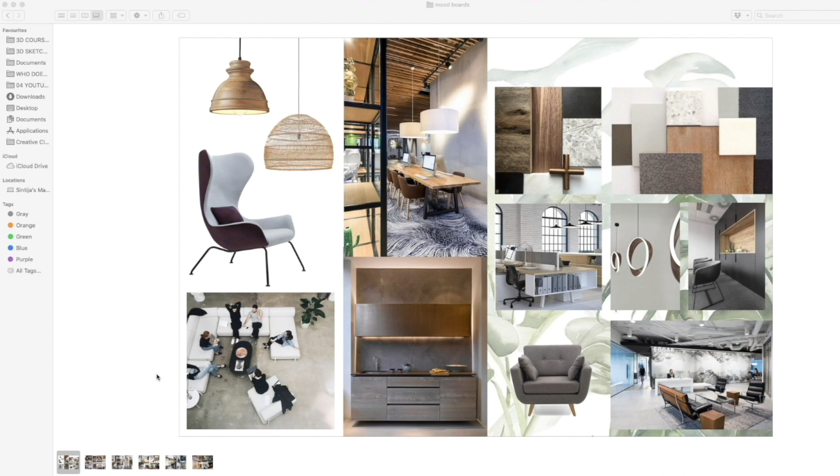Okay, onto the tutorial. Like I said, the best way to go about textures is by referencing your mood boards. In this case, my mood boards were quite general - I haven't selected certain finishes or certain schemes, but what I have done is select images that have the materials that I would like to have. So I have a wide range of options here that I can pick from, as well as different kinds of combinations that I know will work within different situations.

So here, I know that there's going to be some kind of a fishbone effect tile and brass finishes and a nice black and white contrast. So I do have a reference point, but I don't have anything specific as such.

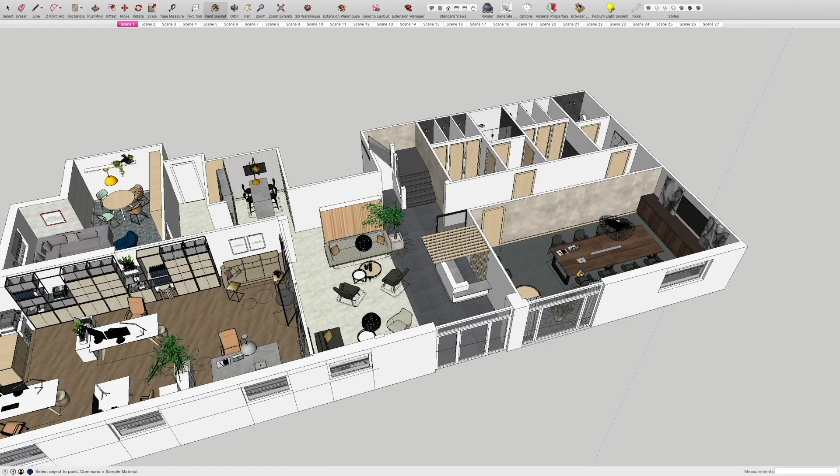Now, this is the actual finished project - I'm not sure if I've said this already, but this is a project that I did for one of my clients. I've worked on it previously and I'm using it as a reference for now. For what we are doing today with the textures, it will be easier for me to reference this model as well, because I know all of this will work and I'm not going to end up showing you some random stuff.

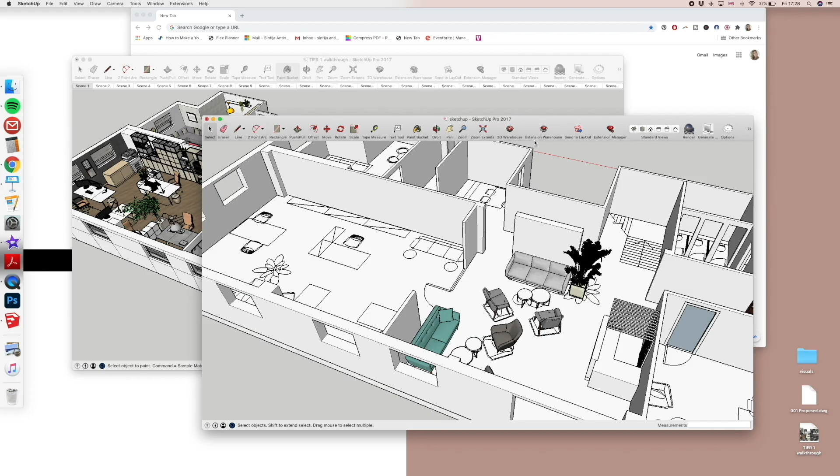Okay, so let's have a look at what we have so far and how we can add some more texture to it. So everything starts with a paint bucket.

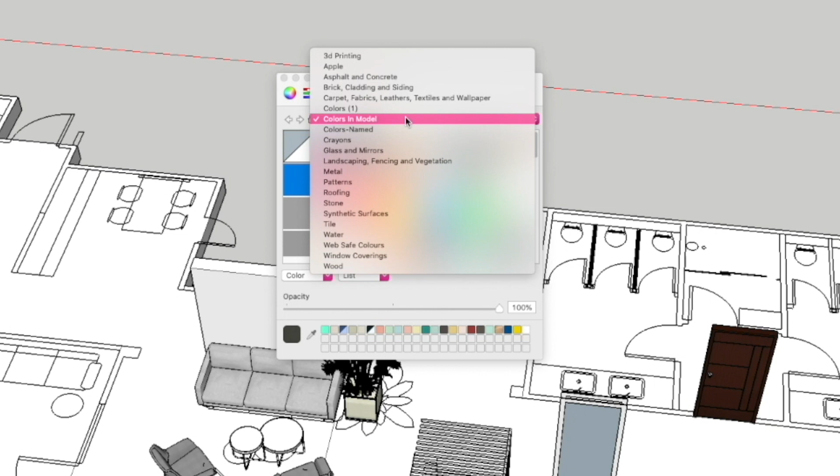Click on it. Now, if you are working on a Microsoft computer, then this window might look a little bit different, especially this section here, but the basics of it all are very simple. Here you can see that there's already a different set of materials and textures that you can use from SketchUp, which is fine.

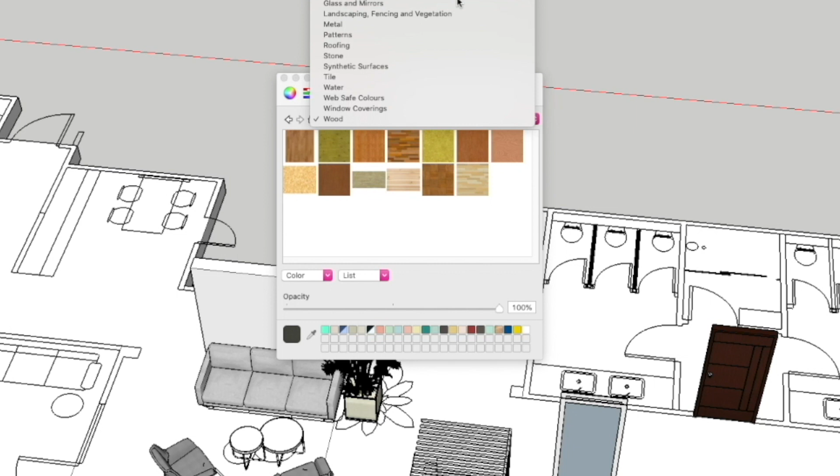They work, I guess, but I don't usually really waste time on these because most of the time, I know what kind of material I want to put there. Maybe I know a specific product I want to use from a specific supplier. So for me, it's always easier to create a new texture.

So what I would suggest is when you are just starting off, pick something specific that's going to jump out, because the interface of this little window here is not really the most user friendly.

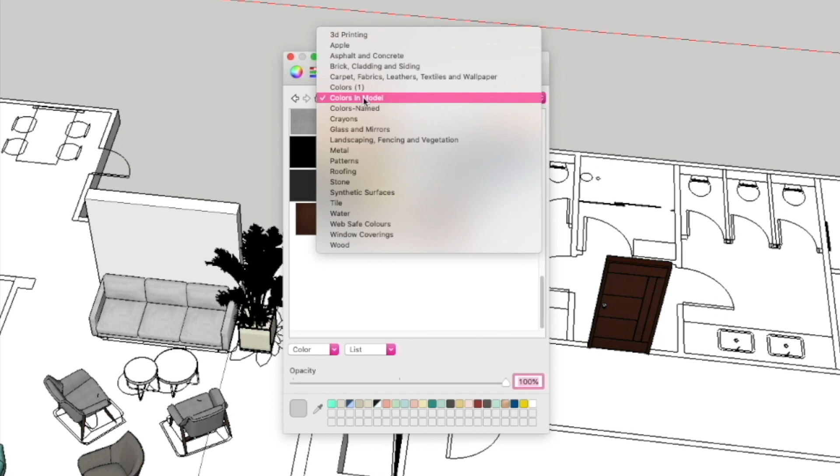So if you just scroll down and select this colors in model, that's basically all of the textures, all of the colors that we have used already in a model, or maybe all of these objects already have built in. I would suggest to use something that really stands out so you can see that you have duplicated that. So I will duplicate this one.

Okay, and there you go. Now you understand what I mean by really seeing the difference.

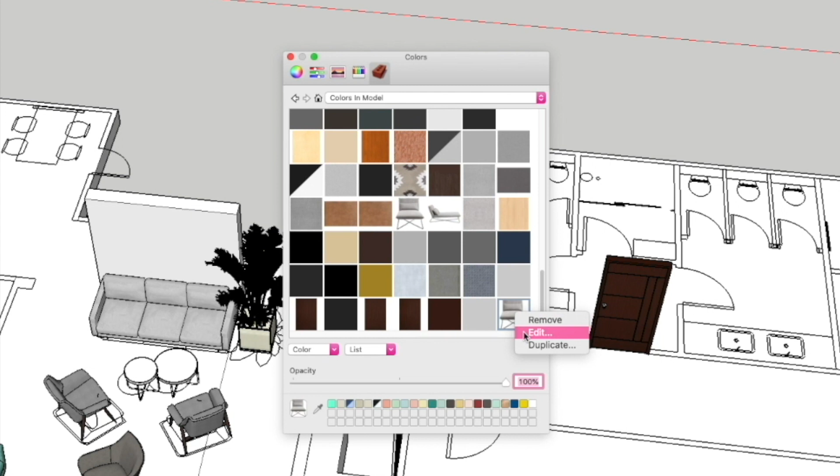So now what you need to do with the copy is just click edit, and the little material window opens up. So what you can do here now is change the width and the height of the texture. You can change the name. You can change whether to remove the actual image or maybe to edit the image.

Sometimes maybe you want to change the color of your texture that you've picked of the JPEG, so then it will open it into a different software. But that's very messy, so I would not suggest that.

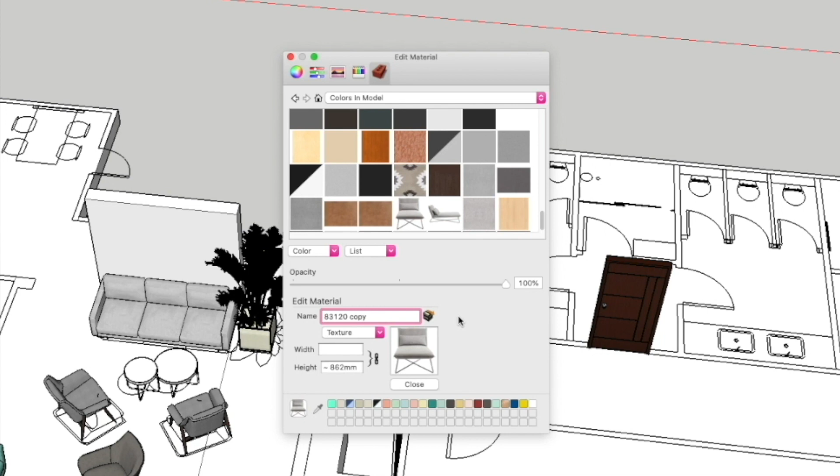Okay, so to change the texture or create the texture that we want, we actually first of all need to find something that we like. So let's look on Google and see what we can find.

From what I can remember, the texture was quite geometric and earthy. So that's exactly what I'm going to type in: geometric fabric and brown, and I'm going into images.

Obviously now you can pick and choose whatever you wish. For the training purposes, I will just go with something that jumps out. I feel like this one could be nice.

So what I'll do now is right click on the image, save the image as, find your folder where you want to save it, and I will need to create a new folder which I will call textures. Strongly recommend creating a textures folder just so you've got one touchdown point for all of the textures.

Now what you can do is either save this texture name if you know the supplier and the name and color and the specifics of it, or what I like to do again, just use my numbers and name it as O1. Now we head back to our model.

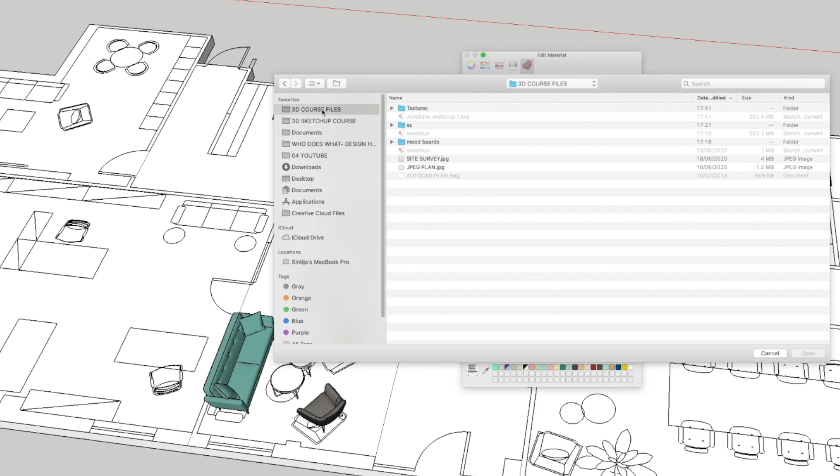Here's our texture. I will click edit. There's our little window. So we need to tap on load, which will open up all the folders that we need. We find our texture folder, select the image that we want, open it up, and there we go. It's loaded in.

So now with your texture, you can change the opacity. Sometimes if you have like a film on a window or glazing that you want to create, then that works well with opacity. Or if it's like a sheer curtain, or even glass material, then opacity works well with that. But this time we're not going to touch that.

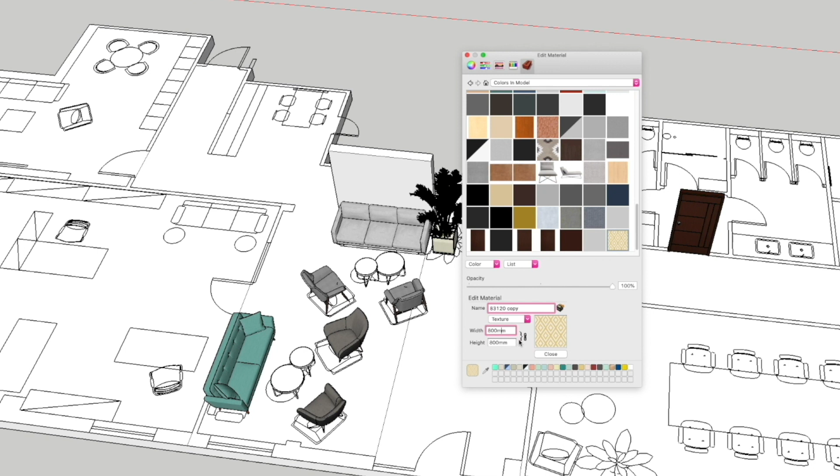What you can do here is also change the proportions of this texture. One thing to know about this little locking feature is that whatever your proportions or dimensions are originally from the file that you dropped in, if this lock is locked, then if you are changing something either on the width or the height, you need to be aware that the other dimension will change as well.

So you can see, but if we are unlocking it and suddenly I want the height to be less than that, then the other dimension does not change. And if you want to keep these proportions, you need to make sure that you lock it back again. So now if I was to change the height to 1000, then this width would change proportionally as well.

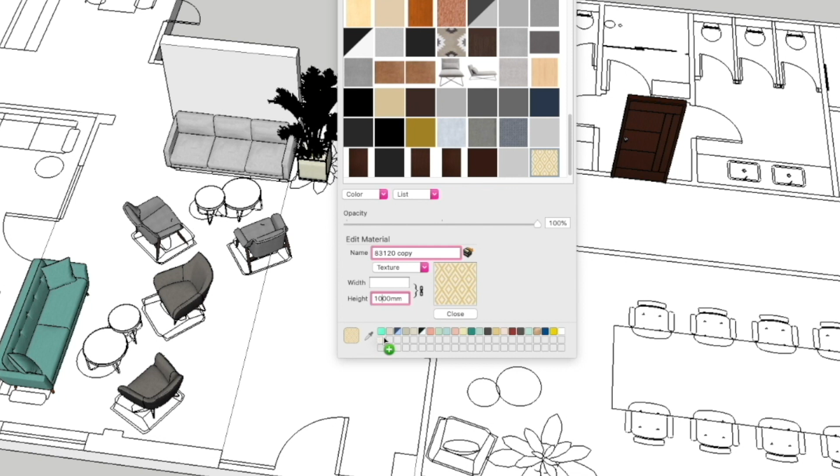I hope that makes sense, but just keep this in mind, and if sometimes the texture doesn't look right, always come back to these dimensions and play around with them to see what works best. And you can always drag it into your little palette under here for quick access as well. That's a good time-saving tip.

That is basically all you need to know about this little texture section. So let's see how we can apply it to our sofa. We need to open up our sofa until we can select the whole surface, until there's no frame around it.

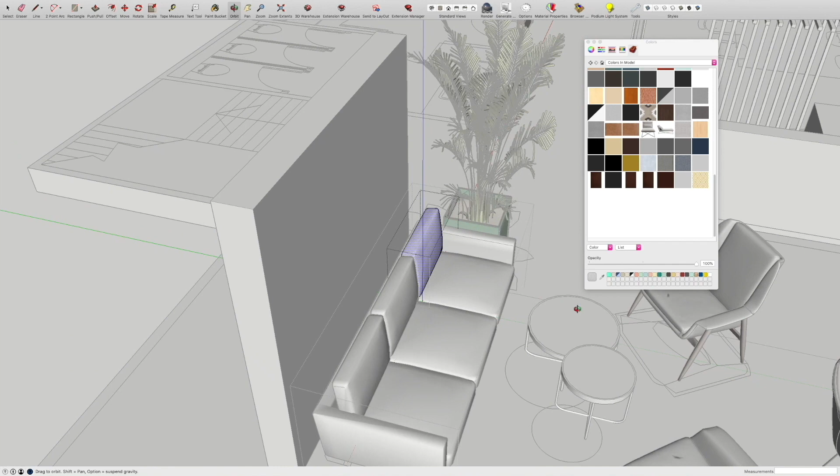If you haven't got your colors window open on the side, just click on the paint bucket and it will automatically open up for you. Select your texture and then just drop it on the object.

Now you can see the actual size of the texture, and if you want it to be smaller, you can go back into your edit settings and start editing the size of it. I'm thinking I want this to be a lot smaller, so I'll go for half the size and see how that looks.

600 looks smaller, that's good. I want it to be a little bit smaller than that, half of the size. There we go, I think that's more like it, and I can just close it.

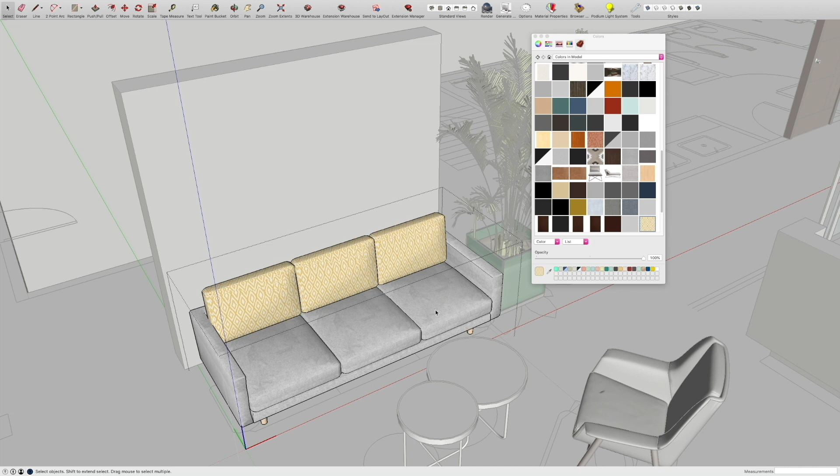Now, sometimes we don't need to enter the group itself, and if we just click on it we're able to change it, but that's not this occasion. So we need to just drop it on each object. It's a little bit time consuming, as you can see.

This is where the component comes in handy. If all of these objects were components, then it would be a lot easier to just change one and the rest of them would change.

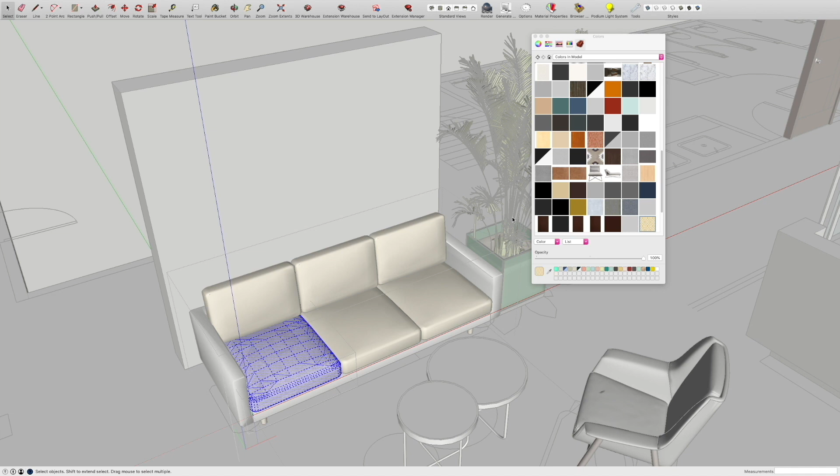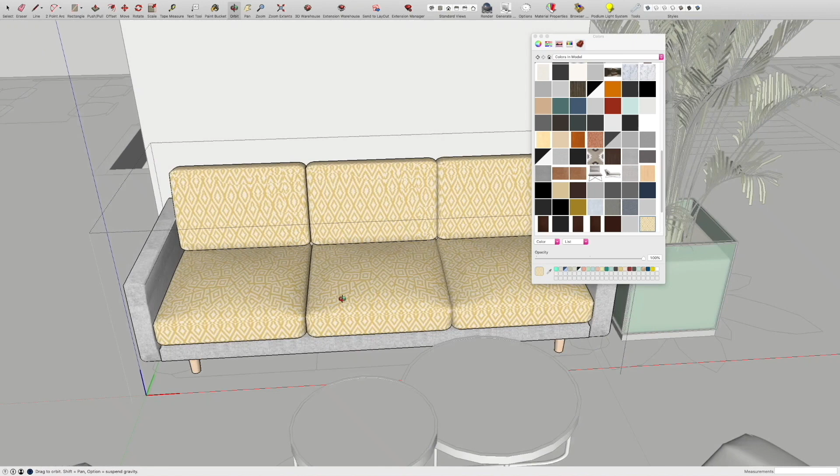Now, a funny thing I've just noticed is because this has been modeled in different software, it will obviously look a little bit different. So when we add the texture, it kind of looks a bit funny and funky. But unfortunately, that's the price we sometimes have to pay, and we just hope that in the visuals it's not going to look as crazy as we might think. And even if it does, we just have to roll with it.

Okay, just make sure you rotate around and haven't missed out any other detail on that object. So we've got a very interesting sofa finish there.

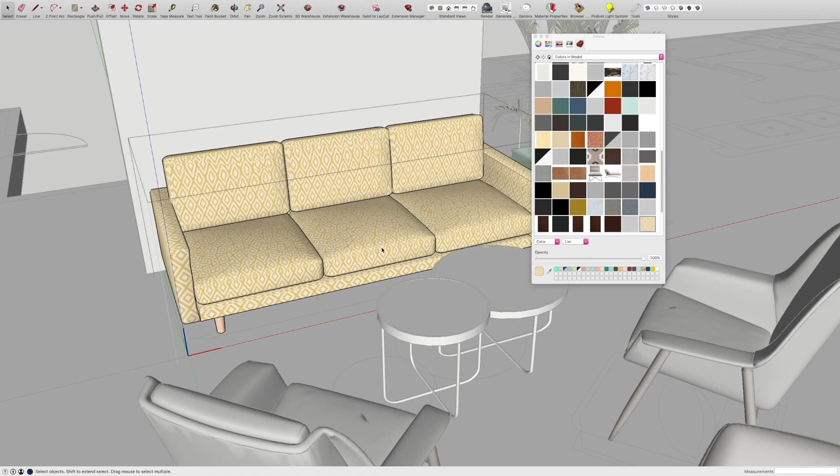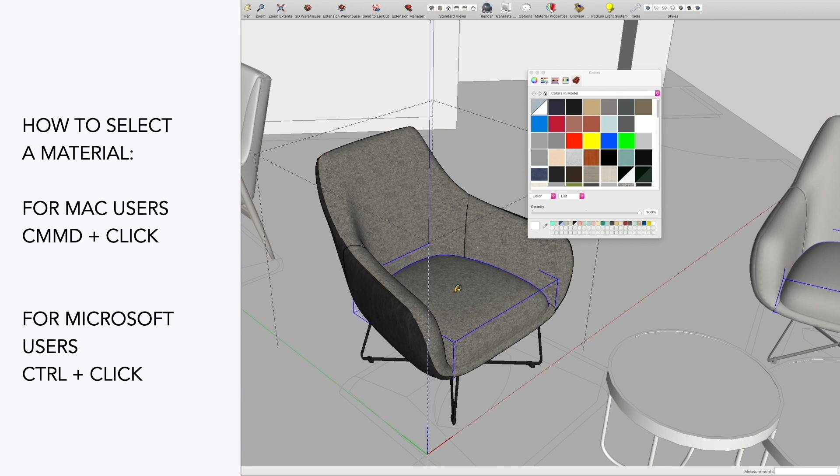Another way to change materials is actually by changing the existing material that's already on the object. Let's switch around a little bit and take this chair for example. All you need to do is select the fabric that you want to change. You can see that's the fabric right there.

This time, instead of duplicating it, we will edit the texture. The way you add a new texture, your desired one, is you just press load and it opens up your folders. Find a texture that you like.

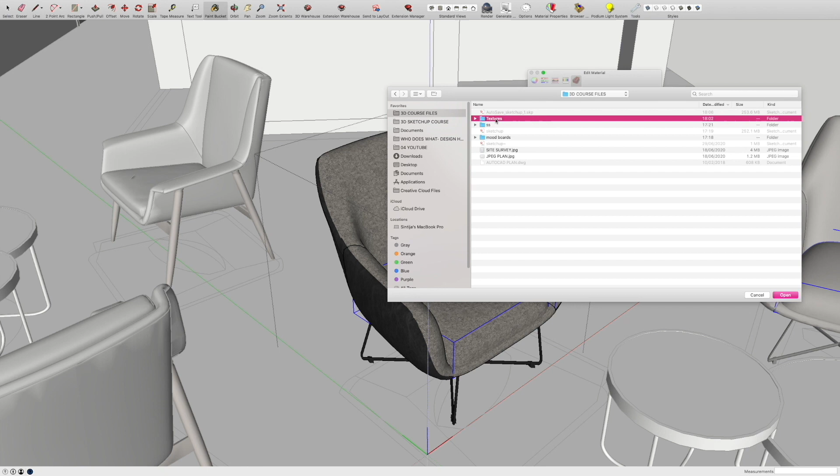And load it in. Now you can see, because these two chairs were components like I mentioned before, the fabrics and all of their elements are changing. As I'm changing one, the other changes as well. So this is handy when you have multiple items around the project that you want to change straight away.

But sometimes if you don't want that change, then what you need to do is break it up and make it unique. So I'll show you how to do that now.

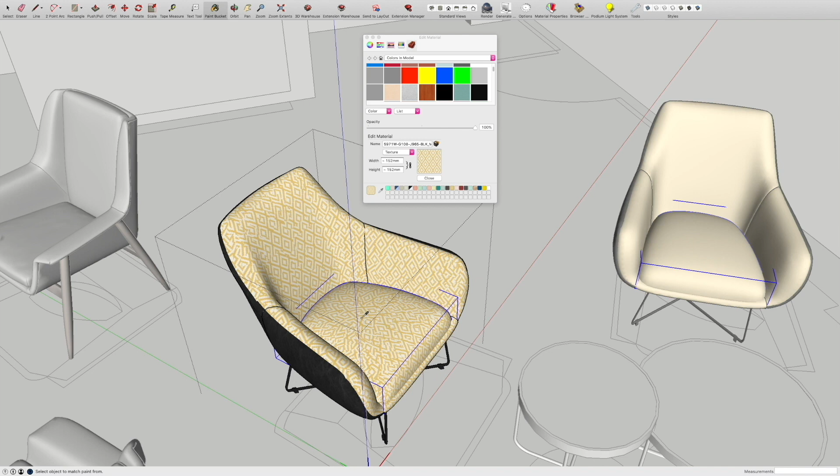Let's say, for example, I'm happy for the backs to be that kind of material, but I want the seat pad to be different. So what you need to do in that case is completely exit the object and start right from the beginning by making it unique. It automatically does that, but it doesn't end there.

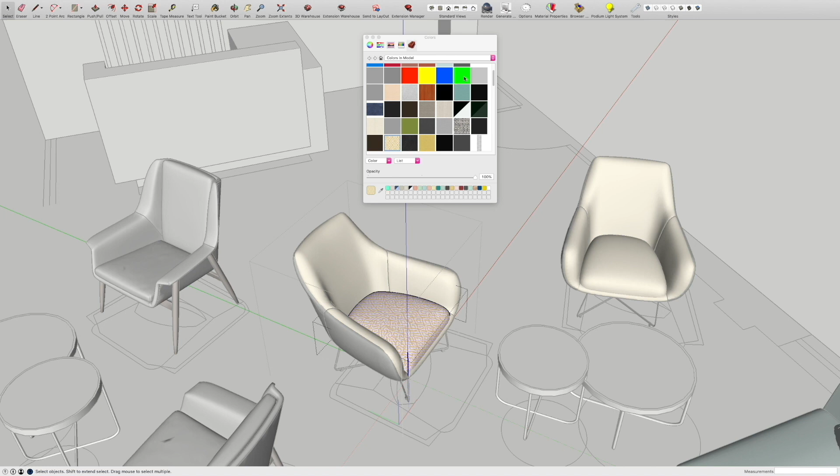We need to open up the object and now make unique the seat pad. Okay, so now let's say I'm just going to grab this great green color and pop it on there. You can see that this chair has changed color, but this chair hasn't.

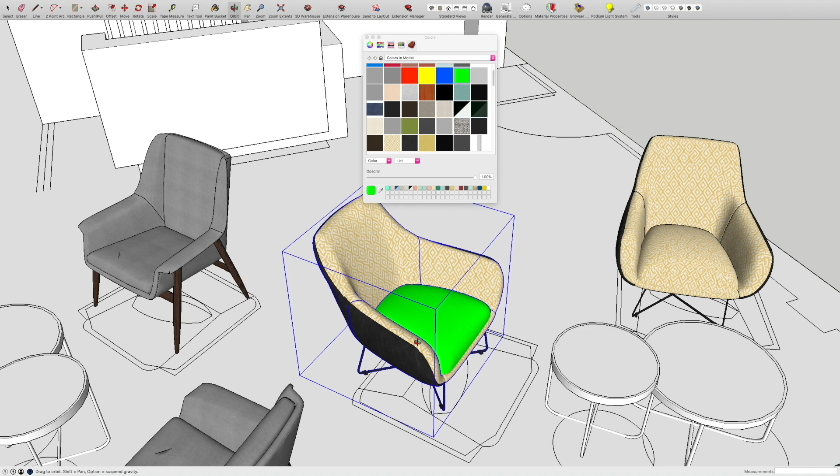So there's a little technique you need to keep in mind if you want some things to stay similar, some things to be different, and just how to manage components. Components can be quite time consuming, so just be patient with it. But sometimes it's very handy to have components already all around the project.

I have had projects with like 400 tables and seats, and it's easier to just change one chair instead of changing every single chair. And then there's another way to create a new texture.

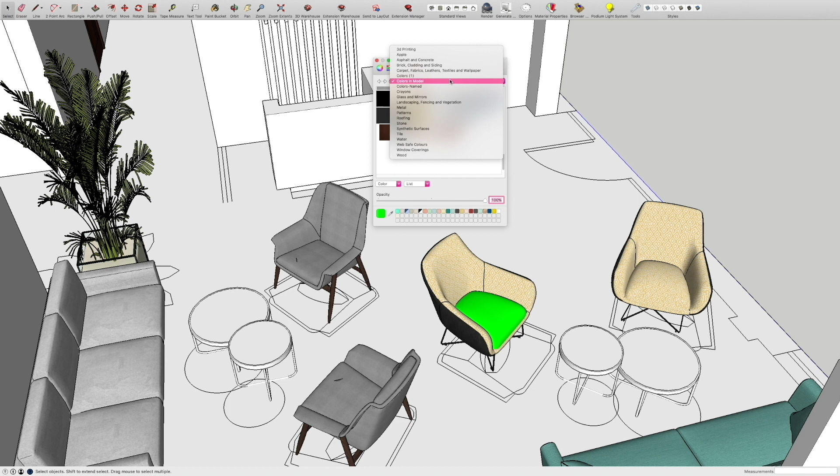Basically, you need to make sure that in this little material window you have selected colors in model, not any of the other colors in model, and then just find a white space somewhere and press right click and new texture, and the rest just follows. You pick your texture and create it from scratch.

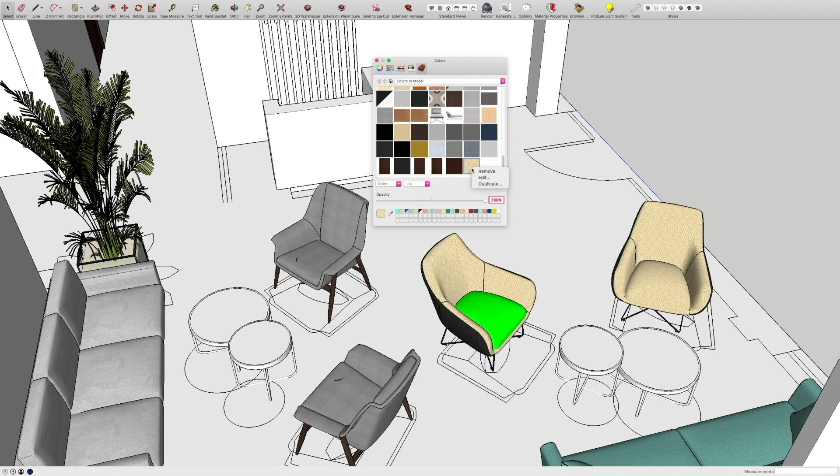And there you have it, there's your new texture, and you can edit it the way we have done so far. Okay, for this next section, I wanted to show you how to actually change the size of a texture on a flat surface.

So let's say, for example, we'll take this flooring material here. You need to just open up the group, zoom in a little bit, and just select the surface.

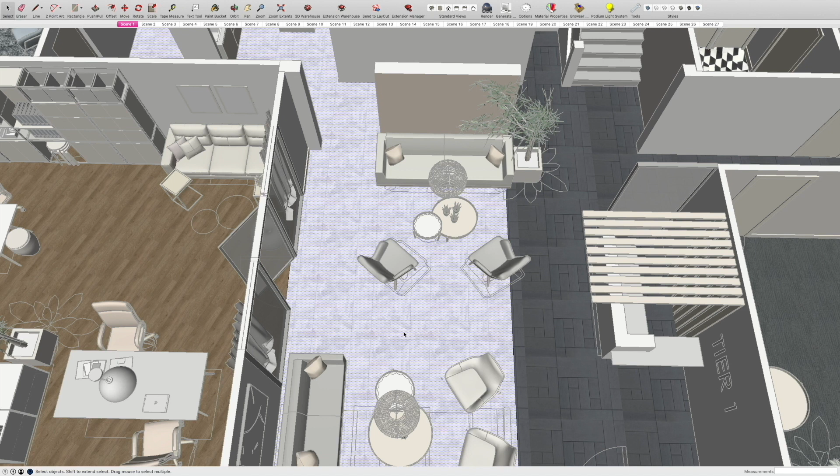Don't double click. Sometimes when we double click, we select the surrounding lines as well. We only need to select the surface, then right click and press texture and position.

This little window will pop up with these colorful points. The only one we need to really use is the green one. I never tend to use the rest of them, they kind of skew and transform the texture, which I'm not really bothered about.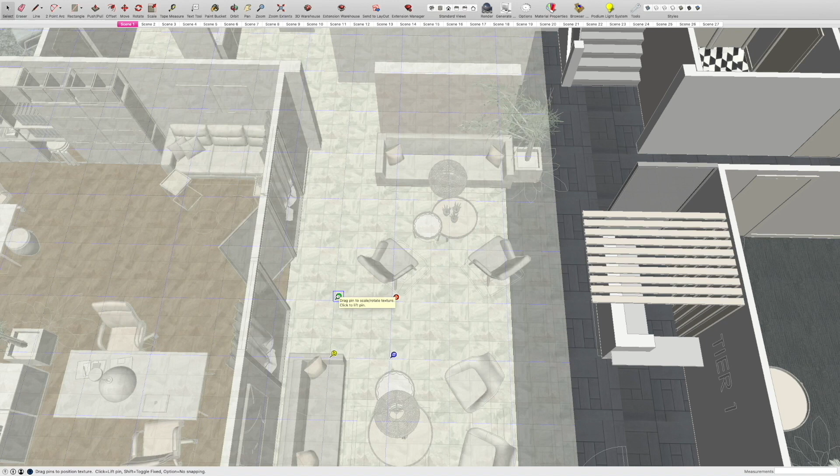The only one I need is this green one, which scales and rotates the texture. So if I click on it and hold it and start to drag it around, you can see how the angle of the texture changes, the scale of the texture changes. It's easier for you to manipulate the texture over here.

So if we wanted to go bigger, we can do that. Also with this little hand tool, once you let go, this little hand tool activates and you can move the texture around. So if you don't want your tile to end halfway through, but want a nice connected line, you can pull it all the way down there, and you'll see there's a little overlap, so just extend it up a bit and now it fits nicely. Then just escape and exit the group.

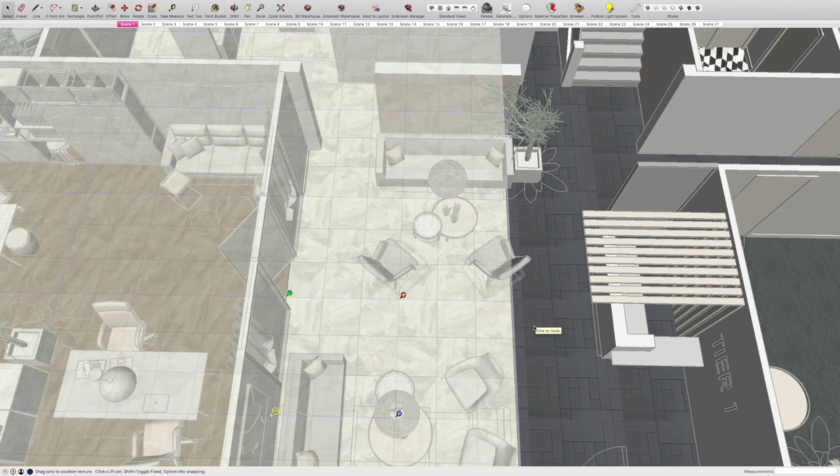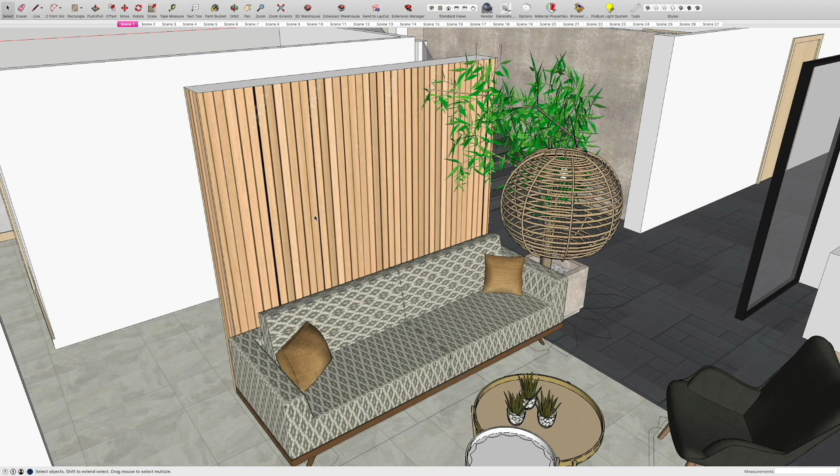Another thing to know about textures is that sometimes it's easier to use a texture instead of an object. This wall is technically a slat wall, so I could have drawn it slat by slat like I did here, but actually I picked a texture that mimics that effect I'm looking for. It's better for you, it's a lot quicker, and it's better for the model because it doesn't bulk it up. It's just a flat texture, not loads and loads of little slats that will take up space.

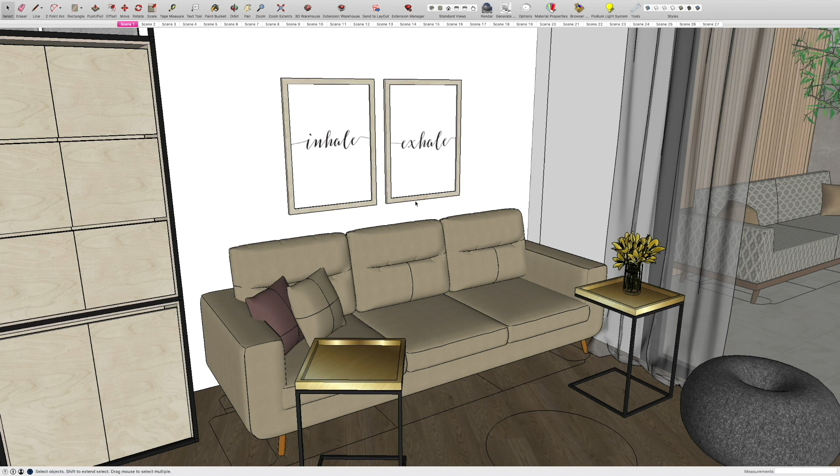Another thing I wanted to show you was how to just drag and drop a texture. Let's say, for example, this artwork - I already have something in there, but for training purposes I'll change it to something else. So what I need to do is the same as with other textures, I need to go online and find an artwork that works for me.

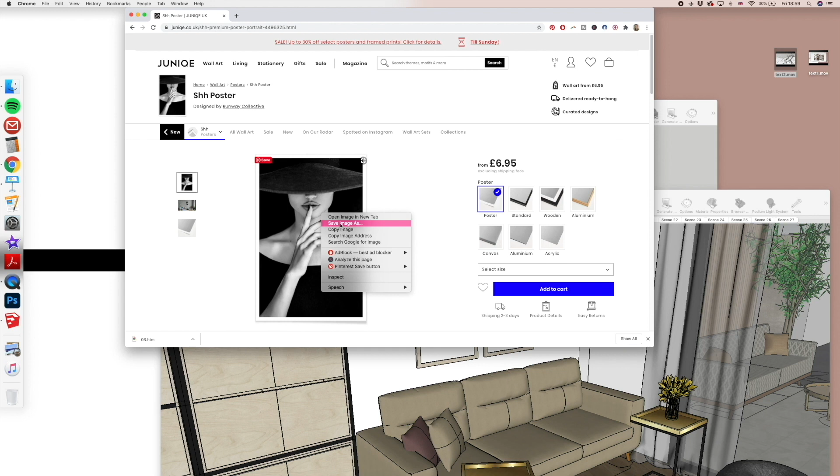So I have found this artwork, this lovely lady that I want to put in. So I would just go and save the image. Now, unfortunately, what's happened here is that it's asking me to save it in a weird format. We need it to be a JPEG or a PNG.

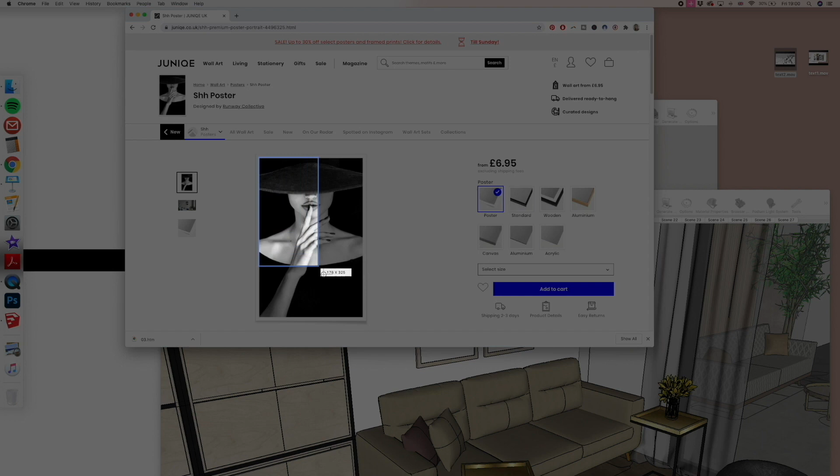So I'm just going to click cancel, and instead I will go to my little snip tool and capture my screen just where the artwork is. Save it on the system and make sure I can find it in my folders. So here I have my image.

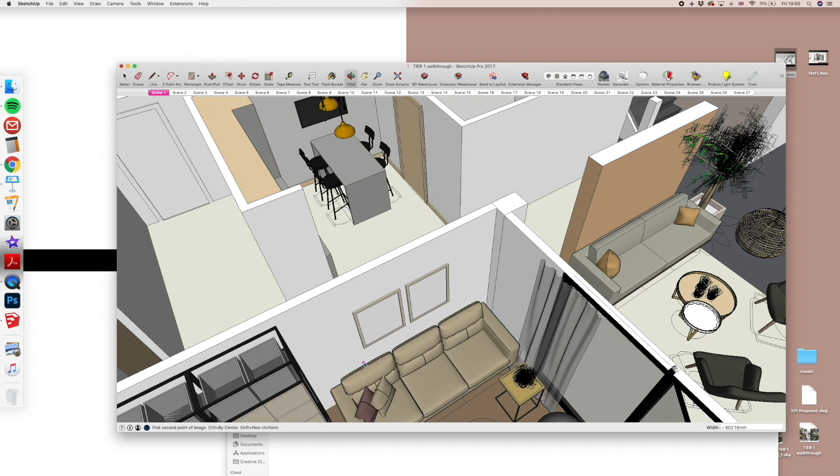What I'm going to do now is literally drag and drop into my file. Let go, click in the file, rotate around a little bit, and click on any edge. Right, so you can see it is huge.

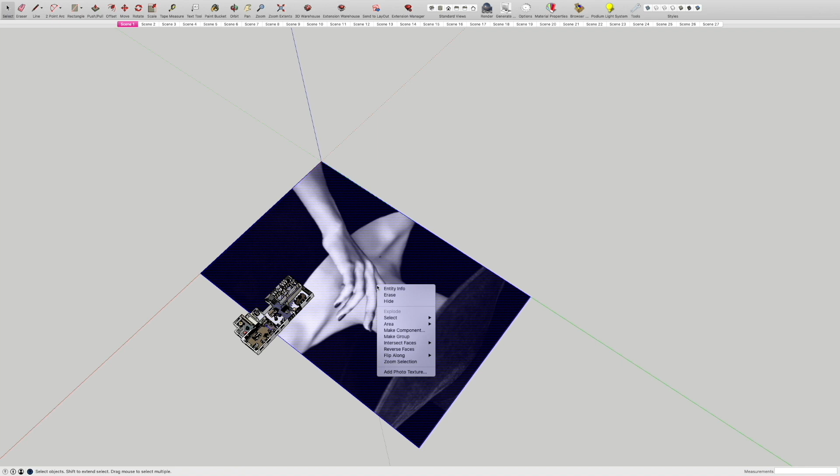But before we do anything to any texture at any point, once it's dragged and dropped and placed wherever it is, what we want to do is make sure it's selected and right click on it and explode it. Once it's exploded, right click on it again and make a group. By doing this, we are almost transforming this image to a texture that we can modify and play around with.

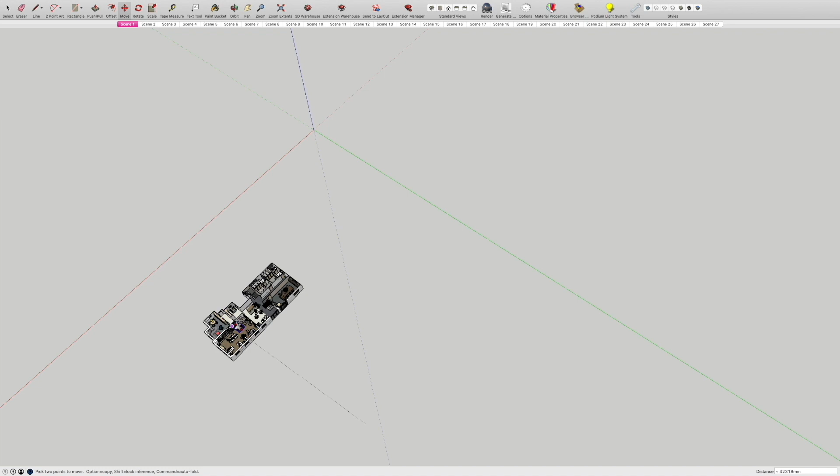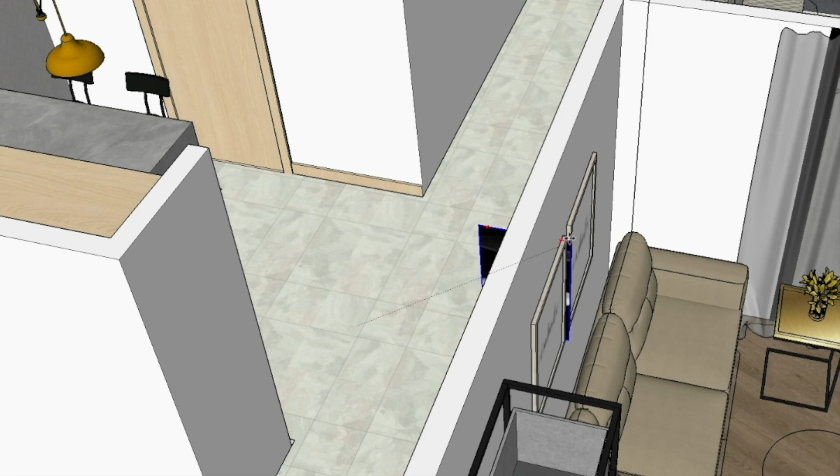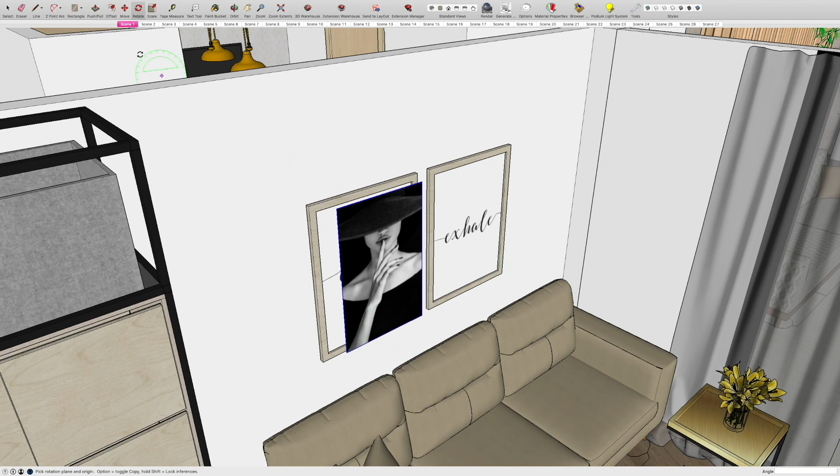So now we need to make sure we scale it down to a size that we like. I'm using my back wall as a reference point to rotate it around, and then using this wall to bring it back up. I'm just going to place it on this little edge. Now, when we have it on the same plane as desired, we can just place it in place right there and scale it up a little bit.

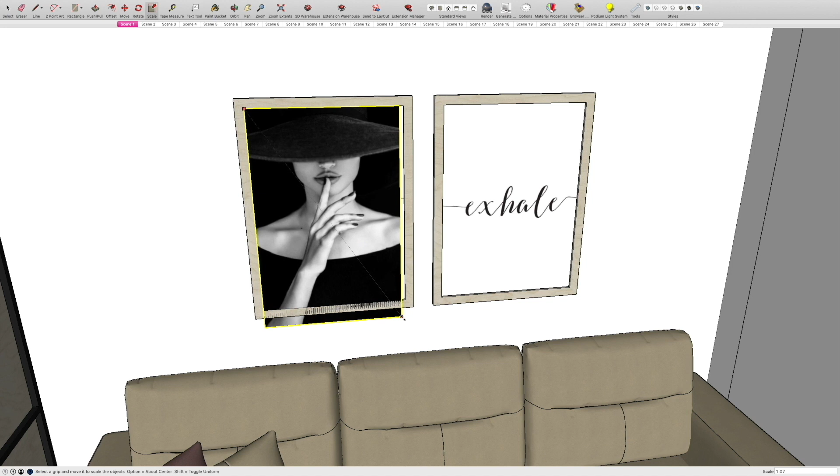So obviously if I start to distort the woman, she's going to look a little funky, like we did previously with the door handle. So I'm not going to do that, but what I'll do is drag it so it overlaps the frame. And because it's like any normal surface now, I can open the object and just cut it down, whether it's down here or maybe up there, whichever.

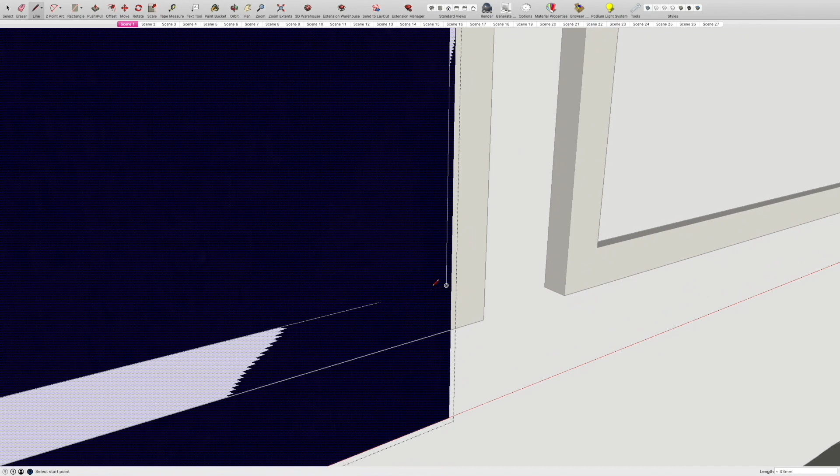Now we're just going to cut it down here. Zoom in. I don't think it went to the edge - yep, it didn't, so make sure it goes to the edge. Delete all the unnecessary lines. And now we just need to move it back a little bit.

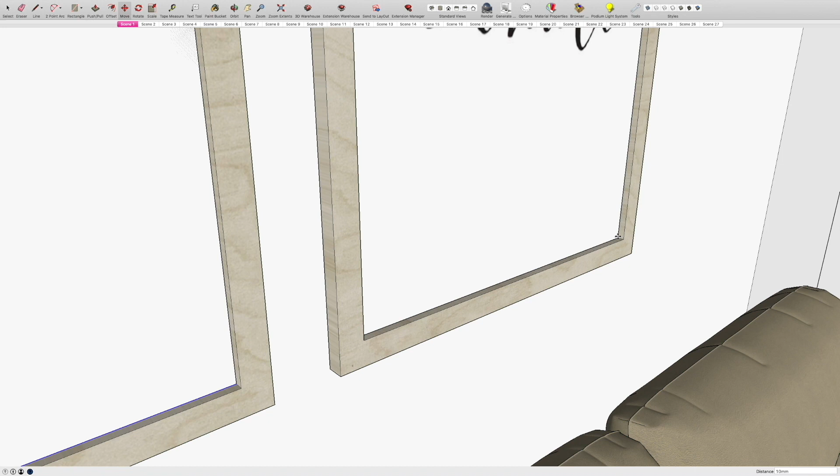Sort of, I'm using the other frame as a reference. So obviously what you can see now is that both of these textures kind of overlap, so I'm just going to make sure I delete the old one. And there we go, we've got new artwork there, and that's how you drag and drop any texture.

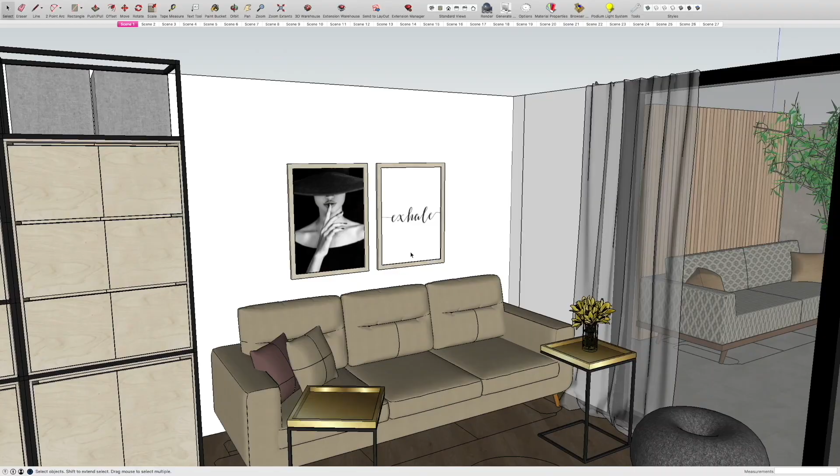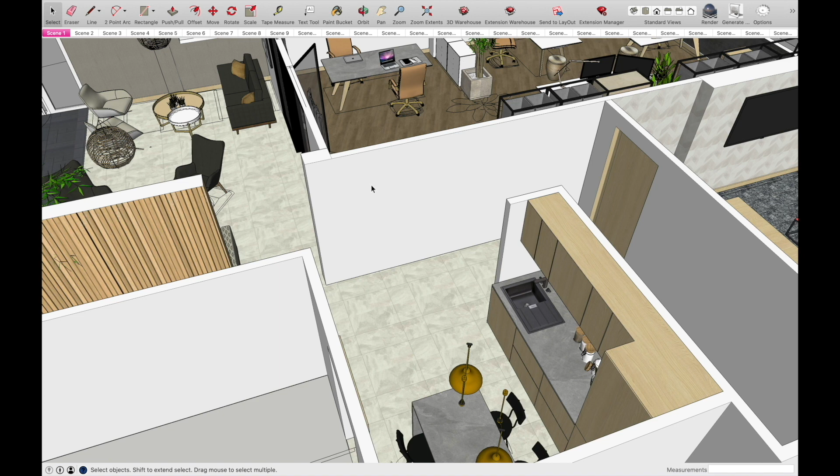Okay guys, one last thing, well, a couple of last things I wanted to show you was how to drop in any 3D text or 2D text. So for example, if you have some sort of writing here that's just like lines, or maybe there's some artwork that's got a transparent background, basically a PNG image, if you have that and you want it to be like a large print, how to do that, and also how to create 3D signage, which isn't there at the moment because I haven't created it. So I will show you how to do that.

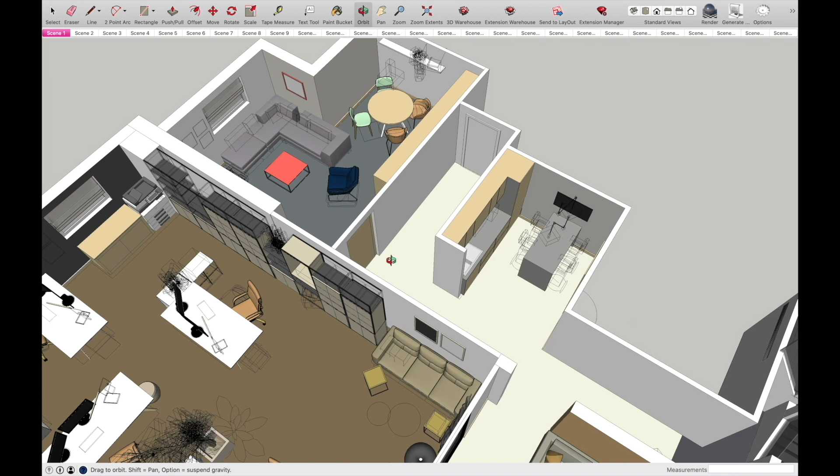So I'm going to switch it up and choose this kitchen wall around here. For example, if people are sat at the table, they get a nice little welcoming message there. I've already found a PNG image online. The way you search for PNGs is literally just by typing what you want to find, so I was typing for positive quotes and typed PNG after it, and you will find that. Or if you know how to deal with Photoshop, you can always just drop a JPEG into Photoshop and create a PNG from that.

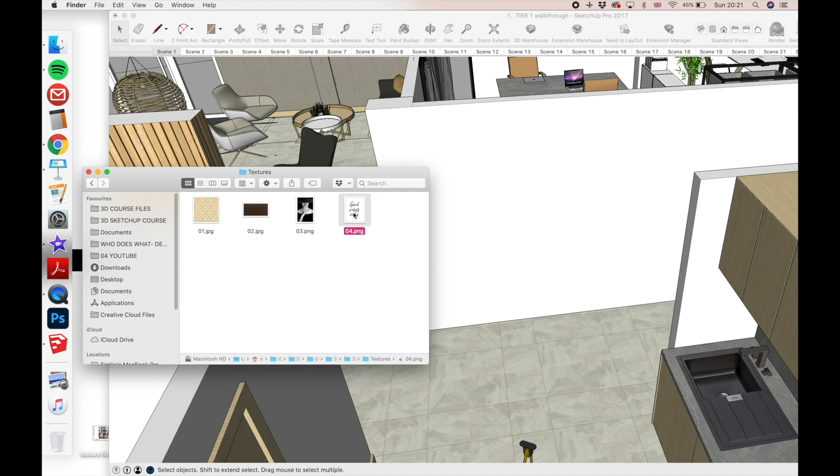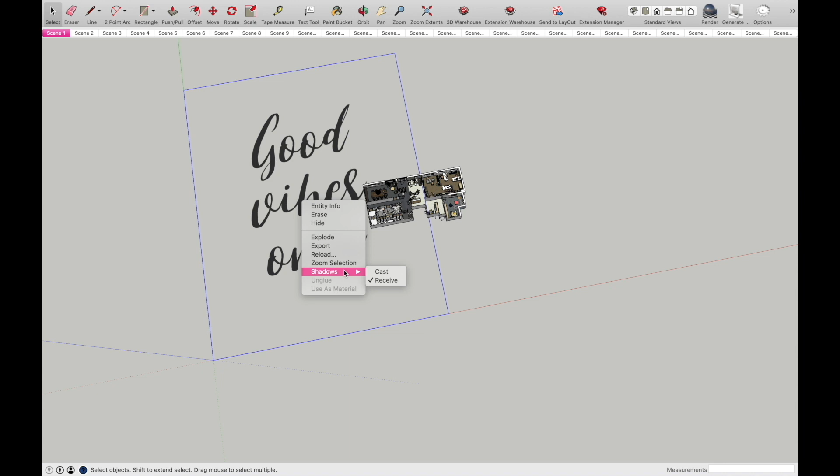So what we're going to do is the same old drag and drop method. There we go, just click on it, click on any point or edge and zoom out, find your texture, and obviously it's off scale. So again, what we do first with all the drag and drops is explode and create a group, then we can scale it down to size.

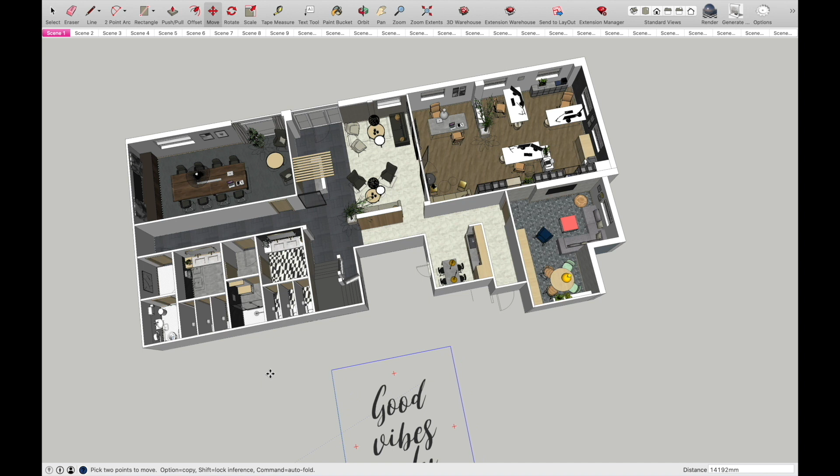When you are zooming in and out in SketchUp, always use your model as a reference. Don't use any kind of empty space to scale in and out, because otherwise you'll be going for ages. When you have something solid to scale against, SketchUp recognizes that a lot better.

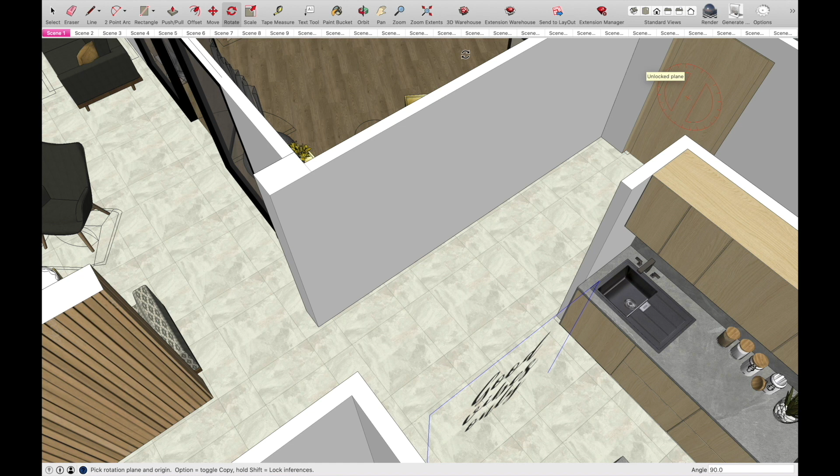Again, I'm going to use the side wall as a reference to place it at a right angle, and I'm going to pop it around here. So that's right there. Scale it down so it meets the wall at the bottom.

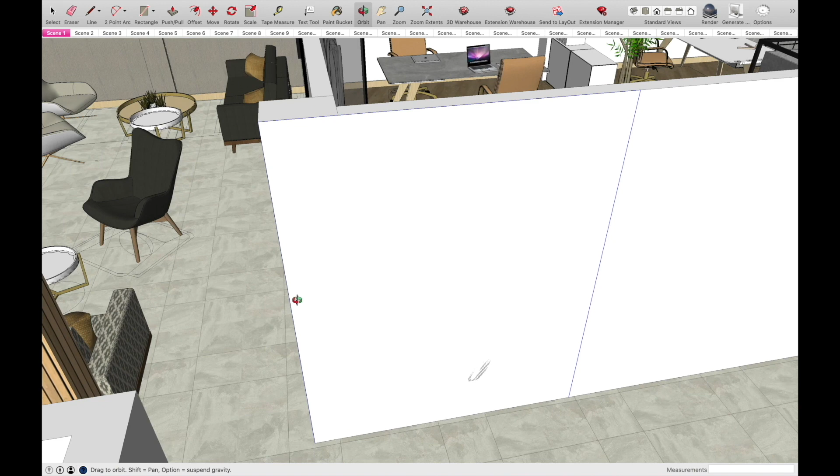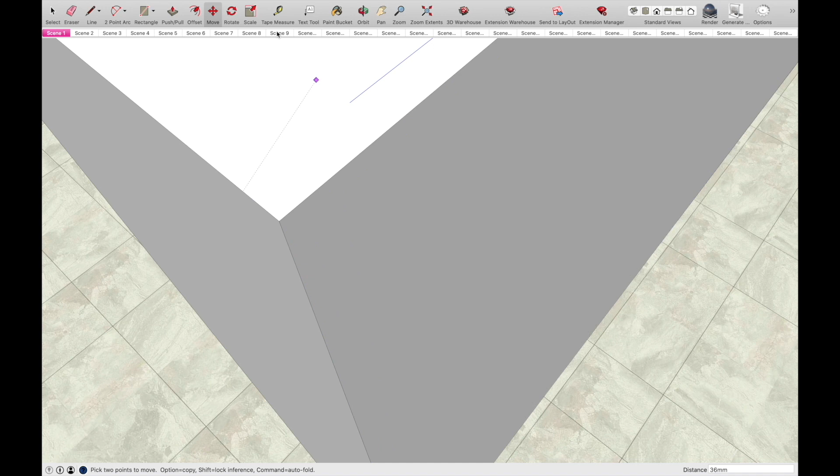When we zoom around, you can see the texture at some point is showing, at some point it's not. What's going on? Because these two planes are literally on top of each other, SketchUp is a little confused what to show and what not. So what I usually do is cheat a little by moving it up a bit. You can even just enter how much you want this space to be. For example, now you can see that's just 36 millimeters out, but even just that 2 millimeters will make a big difference, so we'll go with that. We'll type in 2 and enter. Now when you're zooming around, you can see the texture nice and clear.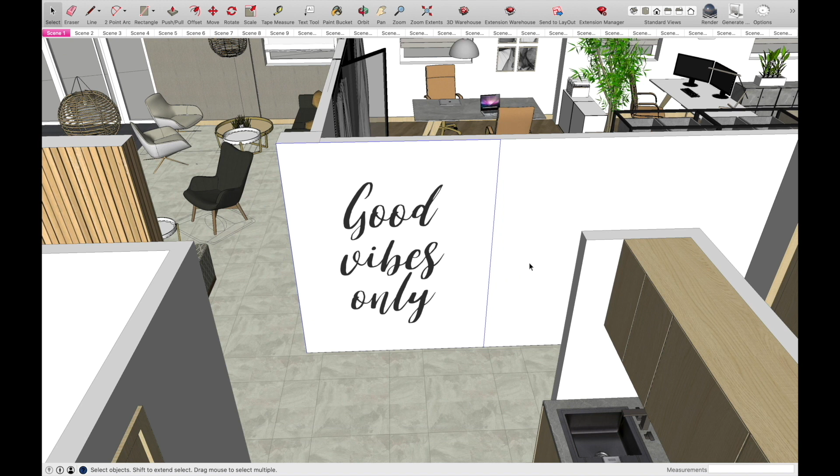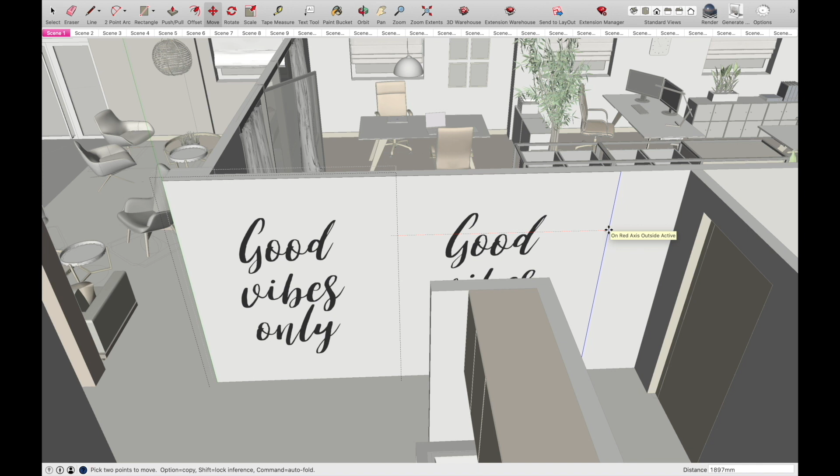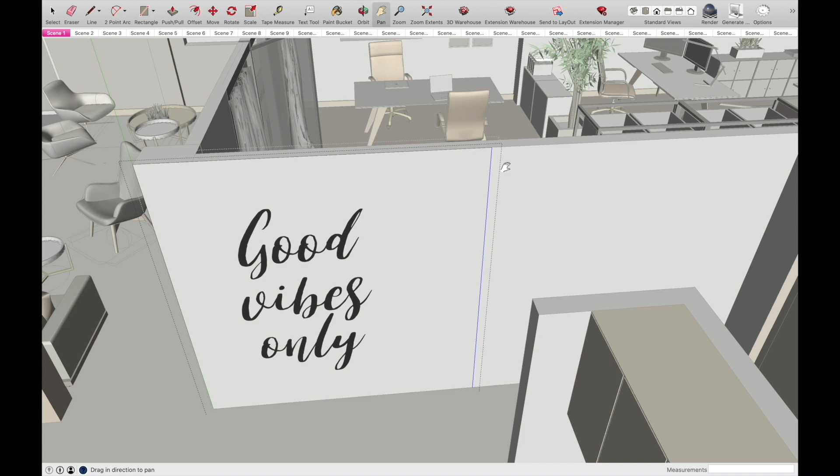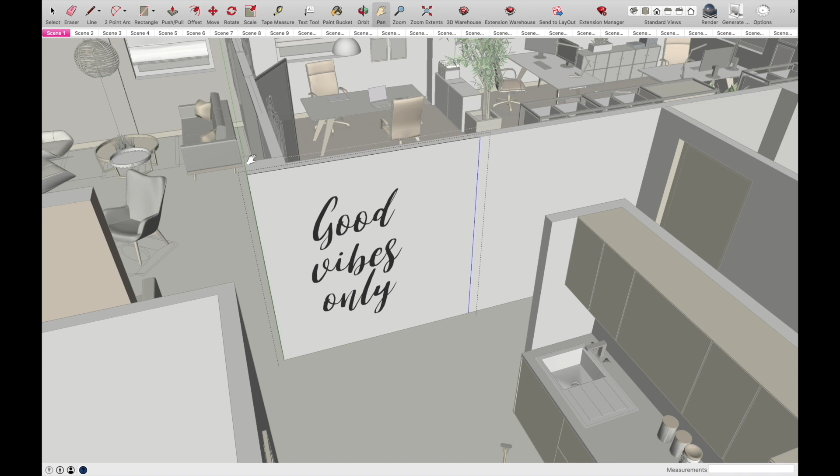Now the only thing that's bothering me at the moment is this frame line. We can't really get rid of it in SketchUp, because if I try to move it to the side - this is also one way how you can drag your walls or any kinds of surfaces - but if I start to drag it to the side, you can see the pattern starts to repeat, and we don't really want two of the same repeating. If you're happy with it, you can always go back into Photoshop once we take this in and just delete this line. That's doable. But what you could also do is use Photoshop to create a PNG image that's got a lot of empty space on the side right here. As you're dragging it out, you'll get to the corner where the lines will meet and you won't get any lines in between, if that makes sense. But essentially you can just go back to Photoshop and delete that little line.

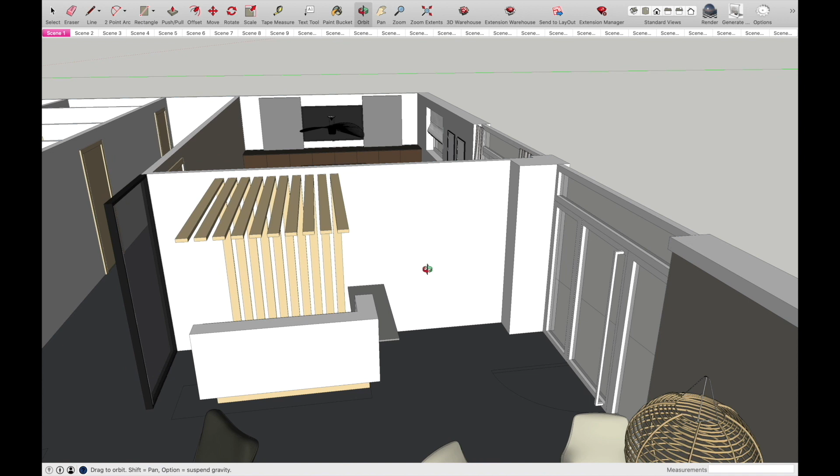Okay, so that's how you drop your PNGs, text, anything without a background in. Now let's say over here we want our 3D signage as you walk in - there's the company logo or any signage like that. So what we can do here is use 3D text. One thing to know about 3D text is that it can really mess up your model.

If I have a big model, I tend to just open a separate window, a separate file, and create the text there, then copy and paste into my main file, just to avoid any kind of crashing. We don't have time for that. You don't want to lose any of your work.

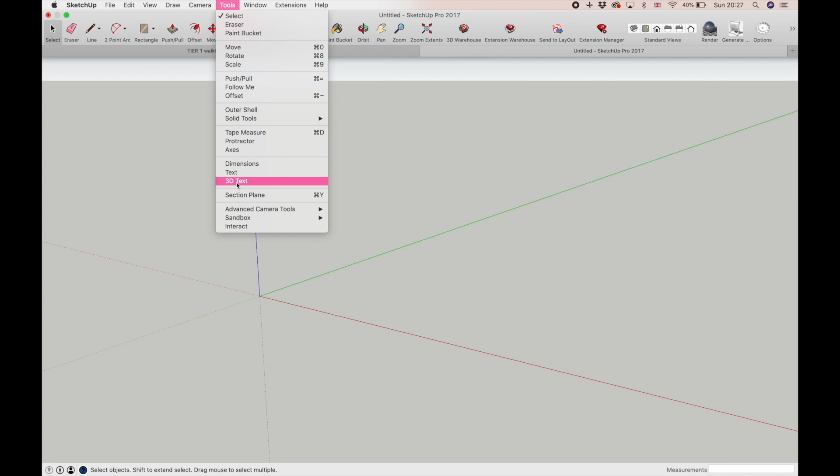To find 3D text, you just go to Tools and select 3D text. This little window opens and you can type in your text. Let's say, for example, the company is called Google. Why not? Let's aim for the stars, eh?

Although if I was aiming for stars, I'd put Tesla in. But anyways, you can change your alignment here. Center, right, doesn't really make much difference, so don't bother with that. Here are little boxes you always want ticked so you can manipulate your text: one is for filled, so your faces are filled in, and extruded, so your letters have some depth, and here you can control that depth. All in millimeters, so I'm thinking my signage should be about 50 millimeters, 5 centimeters deep for now. Don't worry, you'll be able to control that later as well.

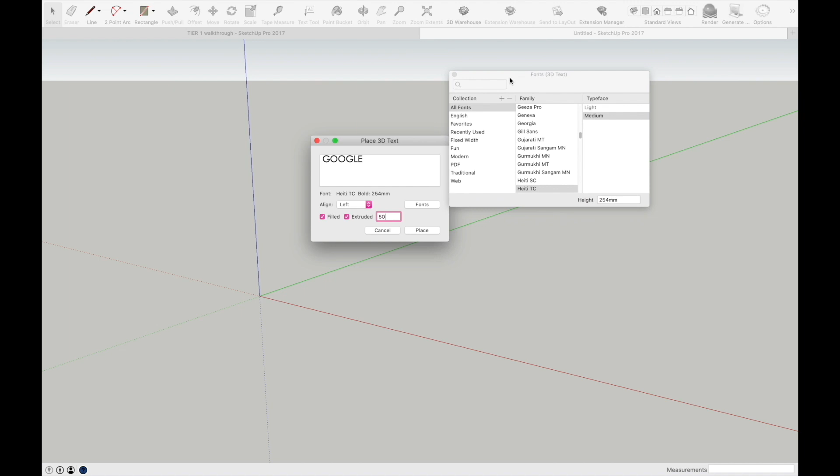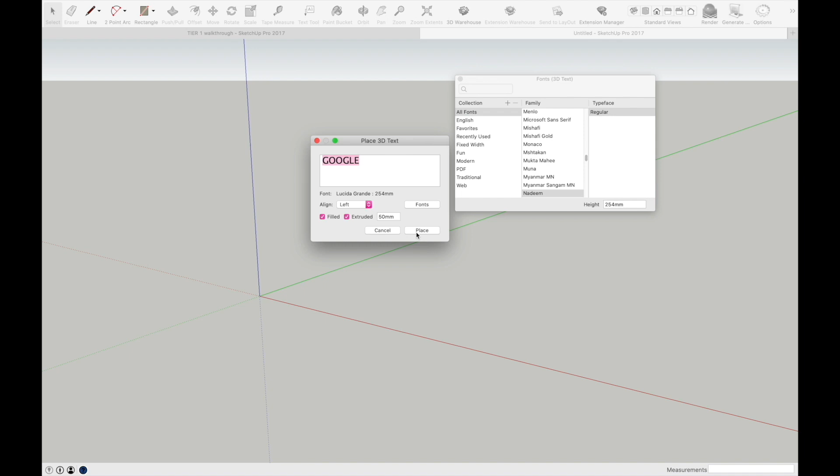Now you get a selection of fonts that are already in there. You need to make sure you have your text selected so you can see how it automatically changes as you go through the list. If I was paying more attention, I'd find something similar to the Google typeface, but for now I'll just stick with this one. And that's about it, we just hit place. And there is our logo.

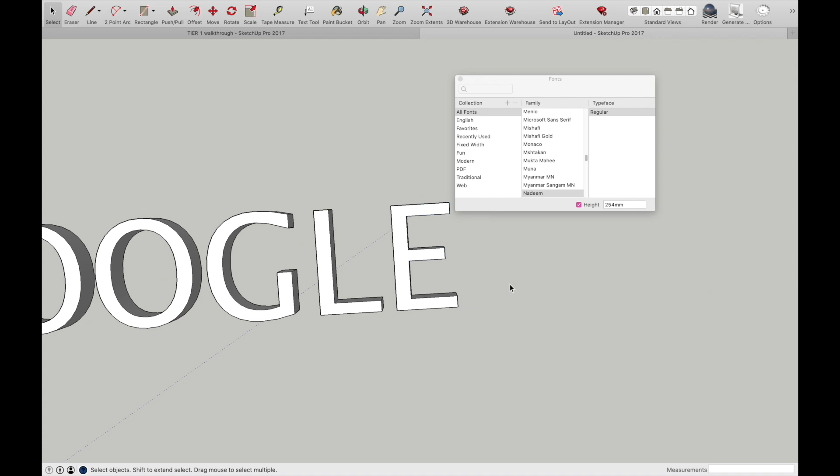It's usually grouped already, so just double check that it is grouped, but the single letters will not be. If you really wanted, you could select each of the letters on its own and then group them. Then you can change the color of it, just the same as you change any other object's color in your project.

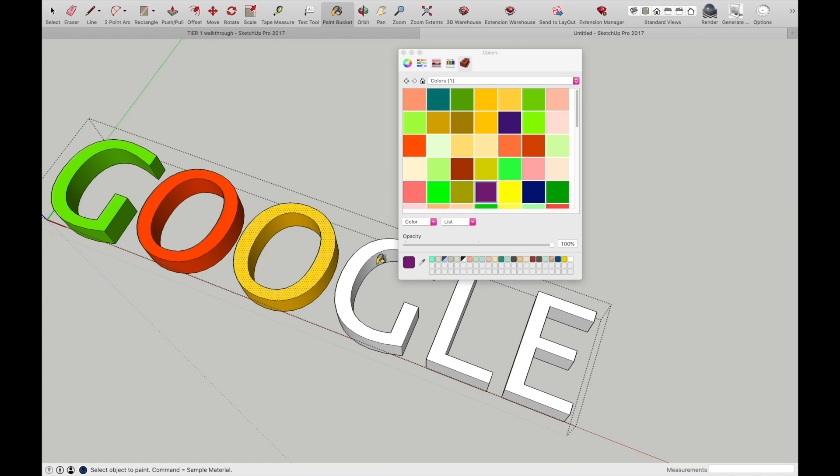So if I go for colors, not really sure how the Google colors go, but it's something like that, isn't it? Should really know it as I use Google every single day.

Do they even have purple in there? Or you can add any kind of other texture as well. If you go to, let's say, cladding, you can put a brick texture on it. Obviously it's a bit too big, so you might want to change the size of it, play around.

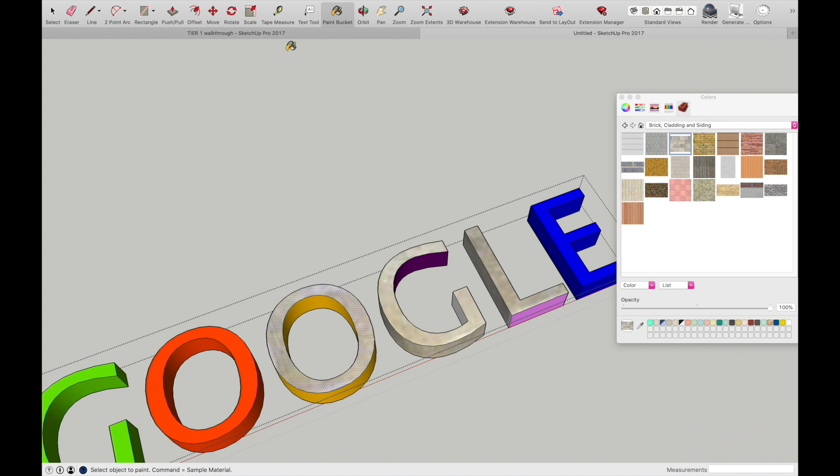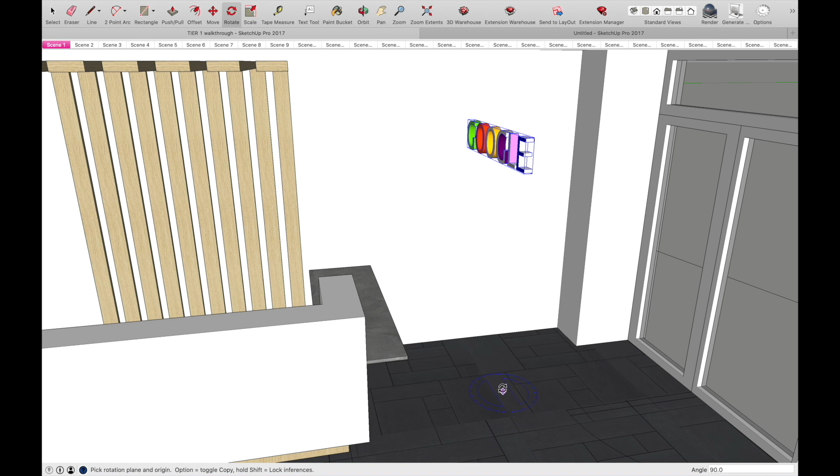What I can do now is select the group, Control C or Command C, go back to my original project, and paste it back in. Rotate around like we do with everything else, using the floors and the walls as a reference. Now just use your move tool to move it all the way back. Make sure you're locked in.

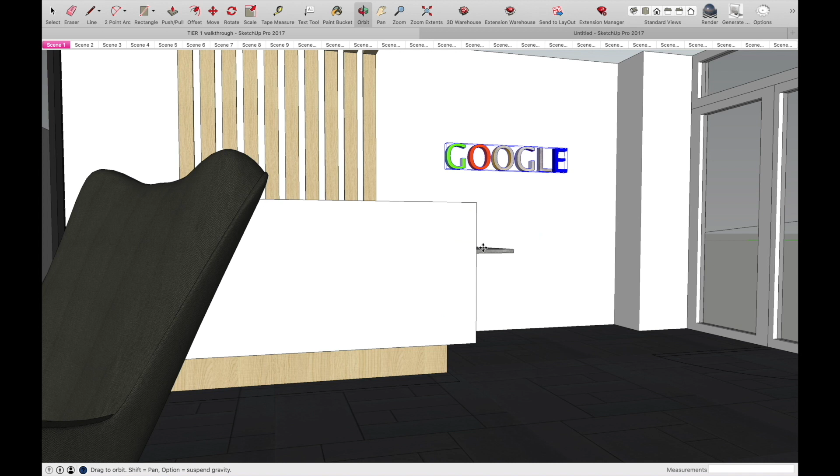Boom. It's probably the nicest Google signage that you have ever seen. Okay, so hope that makes sense. You can do all kinds of weird and wonderful things with the 3D text tool.

Okay guys, so now you've got your work cut out for yourself. Depending on how much you want to do, whether you want to design a whole space or stick with one room for now, it's all up to you. But make sure you're implementing these tactics straight away. There's no better way to learn to do things than just by doing.

If you ever feel a little overwhelmed or feel like things aren't clicking and not working out, don't stress, don't put that pressure on yourself, because you're most likely doing all of this for the first time and still need to get your head around what's going on. So make sure you take a little break and step back if you're really struggling, but then come back again with fresh energy and finish the job.

For me, a project of this size, like the one we're working on, would probably take start to finish about 3 to 4 days, but that's only because I'm always thinking 3 to 4 steps ahead, and I already have the vision in my head when I start the project. So this will come in time. Honestly, if you need to take some time, take it at your own pace. This is not going anywhere and you'll be able to catch up soon.